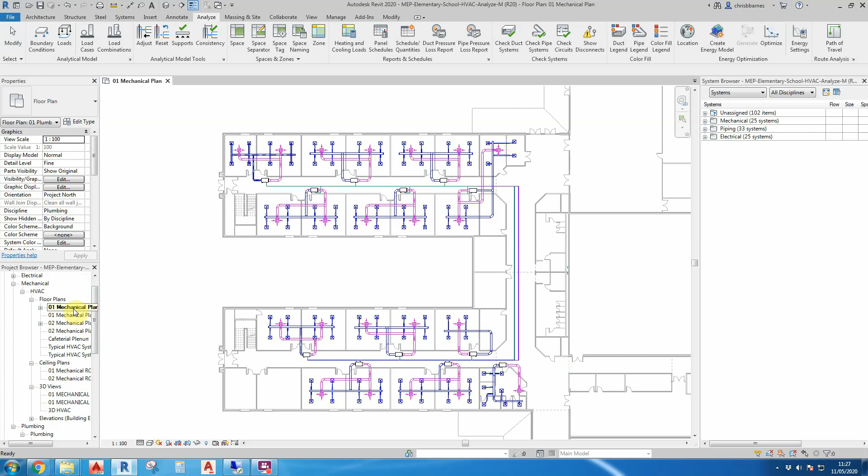What we want to do is to go into visibility graphics and go down to spaces to make sure spaces is turned on. And then we're going to look at this area here. What we need to do is make a note of these room numbers. So if we move our cursor around, we can see that we're in classroom 2009. Make a note of that number.

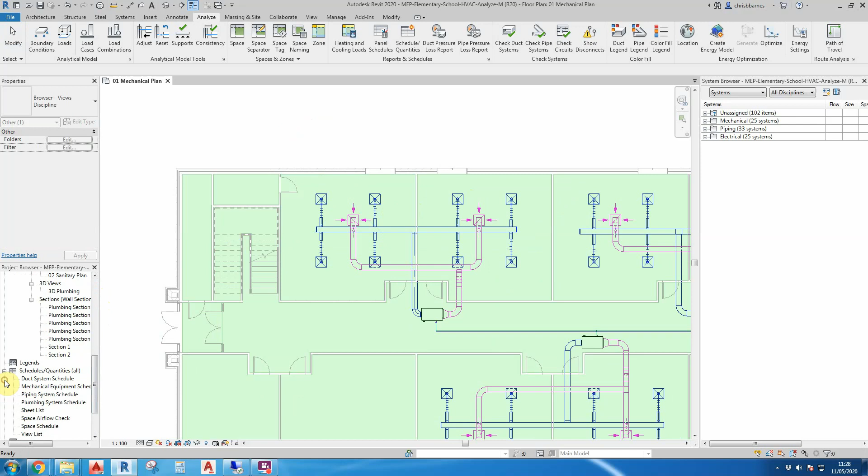And then because this system is connected, we also need to look at the room number of the room next door, which is 2007. Now that we know those two numbers, 2007 and 2009, we scroll down in the project browser till we get to schedules. And then what we want to do is open up this space airflow check.

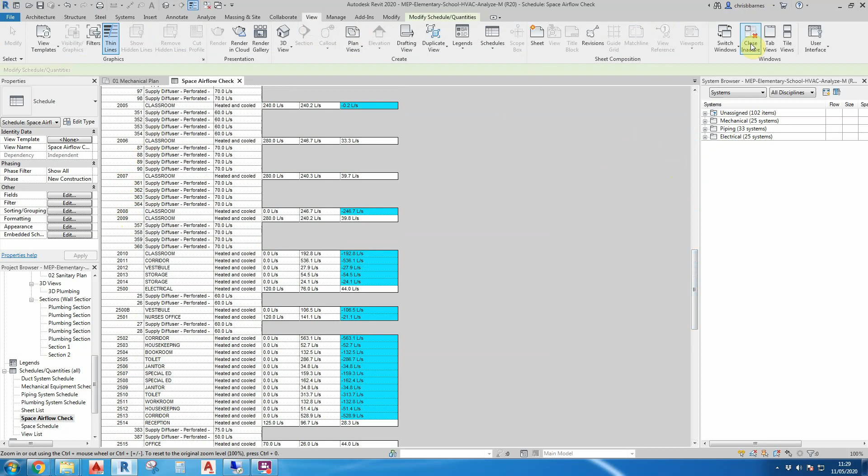Now, column A is our room numbers, space number, diffuser number, and column C is our diffuser airflow rate, and column F is our airflow check. So we need to scroll down till we get to 2007, which is here, and 2009, which is here. Now at this point it's a good idea to tile your views so you can see both of these at the same time.

What we're going to look at in this instance, such as room 2007, is this supply diffuser here. We're going to change one of these and type in 20. Besides indicating that you are working on diffuser 361, you can see that it's highlighted here in blue. What's also changed when we changed this from 70 liters a second down to 20 is that this last column for the room is now a negative number and it's highlighted in blue.

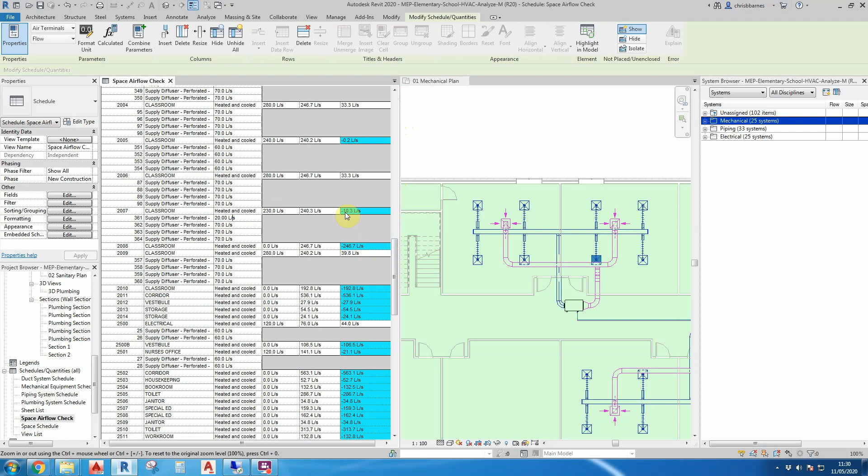If we scroll up again, that was our airflow check. So what it's telling us is at 20 liters a second in that supply diffuser, we haven't got enough air in that room. So if we change that back to 70 again, you can see that now we've got a positive supply in that particular room.

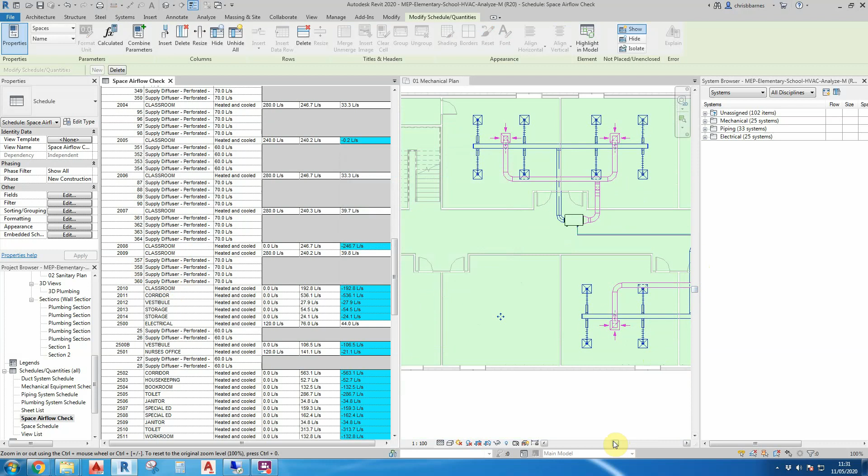If we look at room 2008, we can see that there's no supply diffusers, and also if you look in our window here, you can see that there's no systems in these two rooms. So for us to correct our schedule, we need to put our systems in.

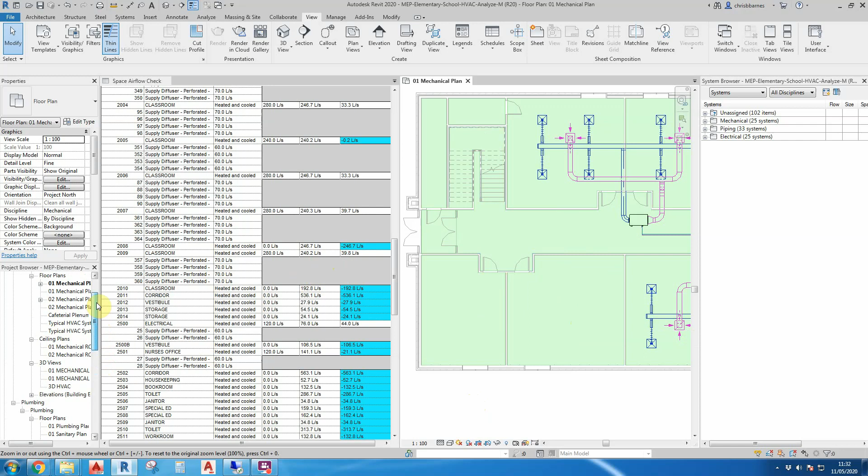So if we open up our reflected ceiling plan, we can see the ceiling grid that we need to put our supply diffusers in. And again, we can copy these. And as you can see, it's starting to add in the diffusers in that particular room.

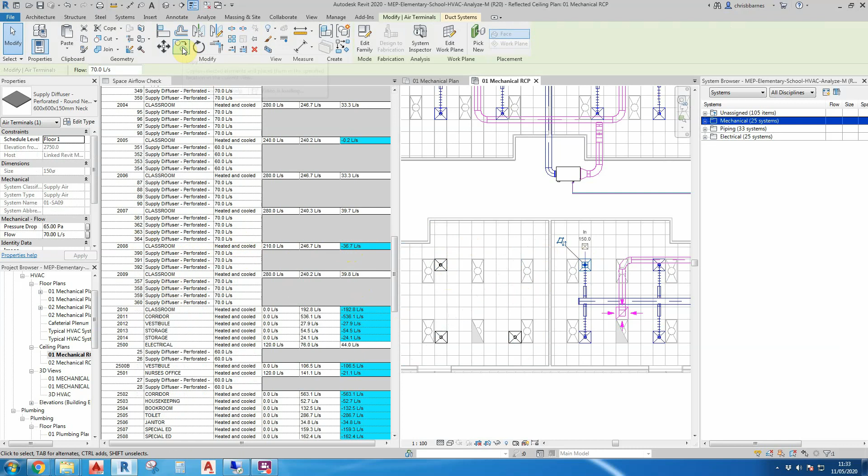And at each stage that we copy one in, we get a new diffuser added in, but we've now got a positive figure because we've entered 4 in. If we look at it when we've only got 3 in for room 2008, you can see that we still haven't got enough, hence why we need to add in 4 diffusers to make this room not be a negative figure.

This room next door here, room 2010, if we look again there, you can see that no supply grills have been added into that particular one. So this is where you would just keep on adding in supply grills into the relevant rooms until we've got a positive pressure, and this end column should show white and not the assigned colour, and you shouldn't have a negative figure.

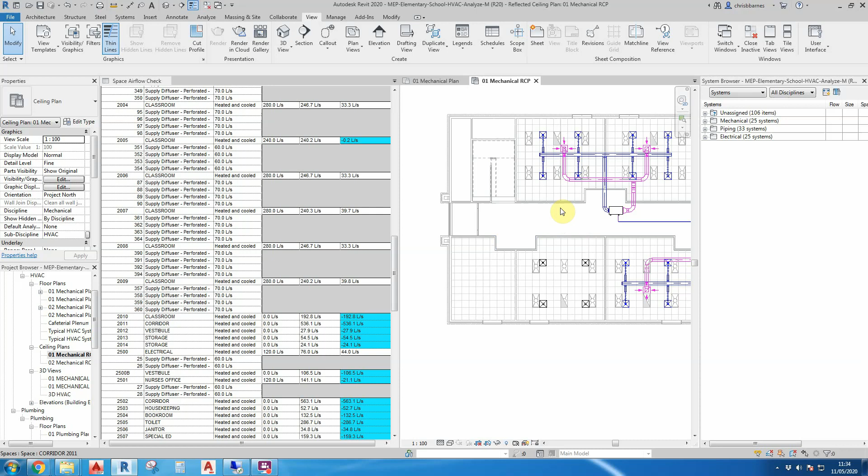So this is where you would just repeat the work of placing your supply grills in, and then you can create your system just like these 2 rooms to make that work. With this room being smaller, you may get away with 3 supply grills as opposed to 4 for the larger rooms.